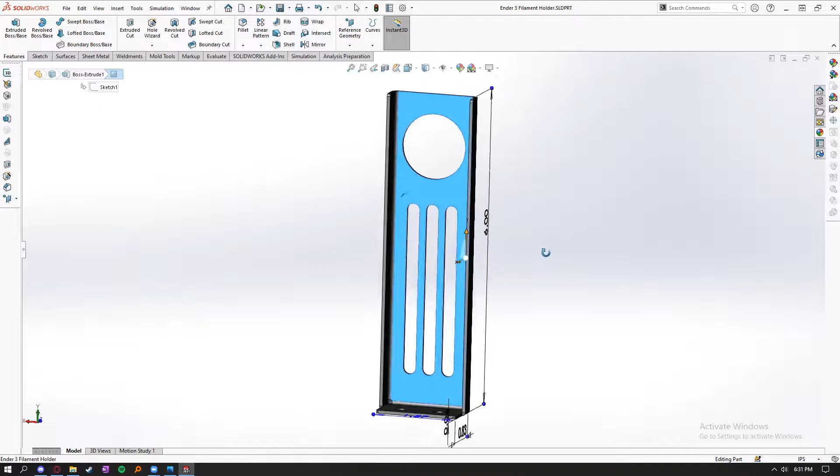Alrighty, so SolidWorks sheet metal tutorial. This is a filament holder for my Ender 3 3D printer. For reference, I took this picture.

Is this showing up okay? Yes. Yeah. Okay,

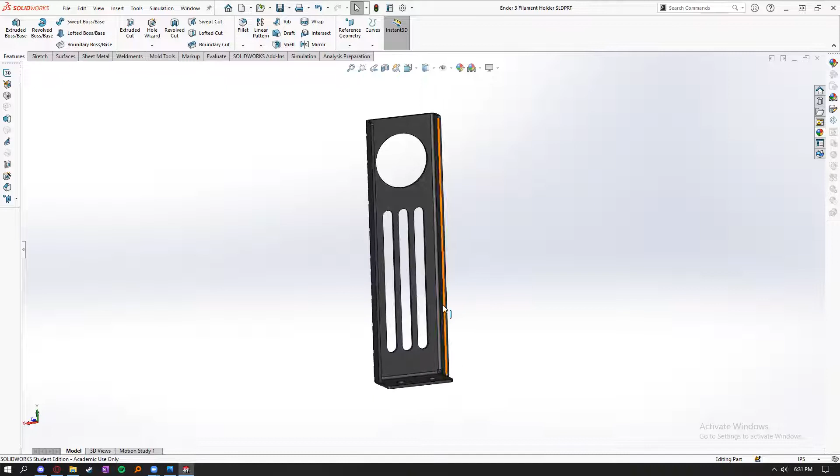so you can see it here. It's just a little bracket that bolts to the top of the printer and basically just holds the roll of filament. And this is the example one I did. That turns out to be pretty much the same, but I took some measurements and yeah, so we'll go through the process of duplicating this. However, the basic fundamentals of sheet metal will be applicable to any part that you make, different bends, different geometries, all that stuff. It'd just be the same process.

So there's many ways of doing sheet metal. My methods have changed over the past 5 years. I used to do it the hard way, and now I have learned an easier way. So we'll go through that in a second. That being said, all ways are valid. I have my own style of doing things. People have different styles you develop over time. SolidWorks is very free in that way, where you're able to customize things to your liking, and then if you produce good parts, it's all good.

However, there are a certain set of standard practices that make editing parts easier, sharing parts easier, and if someone else wants to come look at your CAD, if they want to change something or they want to understand how you modeled it, if you follow some very simple principles, it'll make it a lot easier for yourself and everyone else around you.

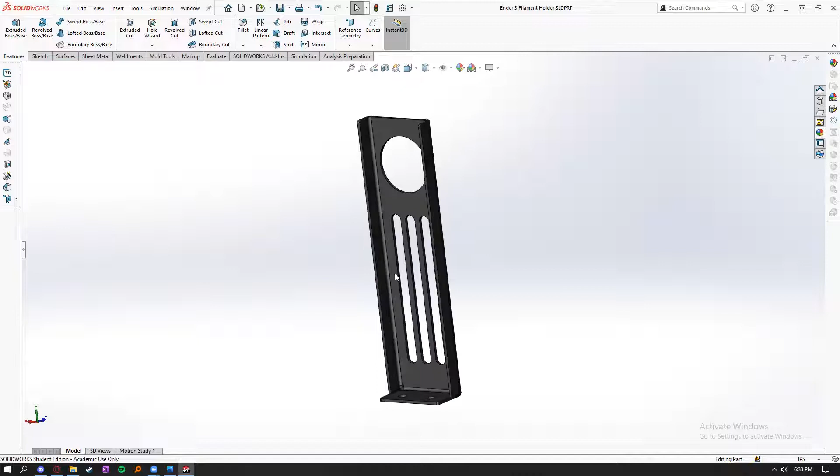So we'll set up a new part. So I just have an imperial part. You can change your units down the bottom right corner here. So we'll do inch pound just because we are friends with the Americans. All right, so I'm going to do a sketch on the right plane. So we're going to right click on the right plane, make a new sketch. And then we're just going to do the basic side profile of our sheet metal part. So this is the new way that I've learned a while ago. So just make a rectangle and then a vertical rectangle.

Oh, we got one more. Hey, Paul. We're just starting out. Feel free to follow along, it's literally just made this sketch so far.

So this is basically going to be the side profile of our main bracket. So doing this method of sheet metal, basically I want to make what is the base plate of the part that everything else is going to be bent off of, or whatever can get the most geometry in one sketch. So in this case, I'm doing the side profile. I'm just going to make the sides equal.

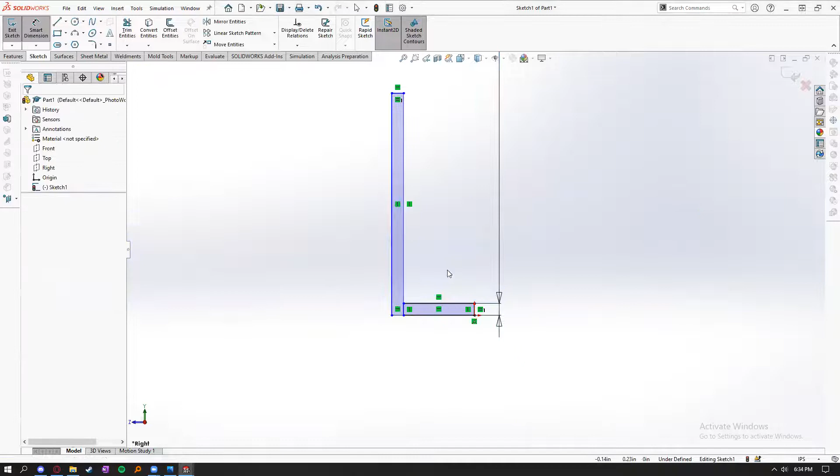I'm going to make that to 16 gauge, which is 0.0598. 0.0598 is 16 gauge sheet metal. I don't memorize all of this stuff, I had to go look it up on Google when I was making this. Because I measured the actual thing and it was like 0.061, and because it was painted, it's a little bit thicker. Closest thing was 16 gauge.

So now both of these are 16 gauge, and I'm just gonna trim up this sketch. I'm gonna go trim to closest, which is my favorite one. You can do power trim and trim away inside, but trim to closest is very consistent. And because I'm very anal about my CAD, I got an extra line here. It's not important. I could leave it. I'm just gonna delete that one, drag it over, connect it.

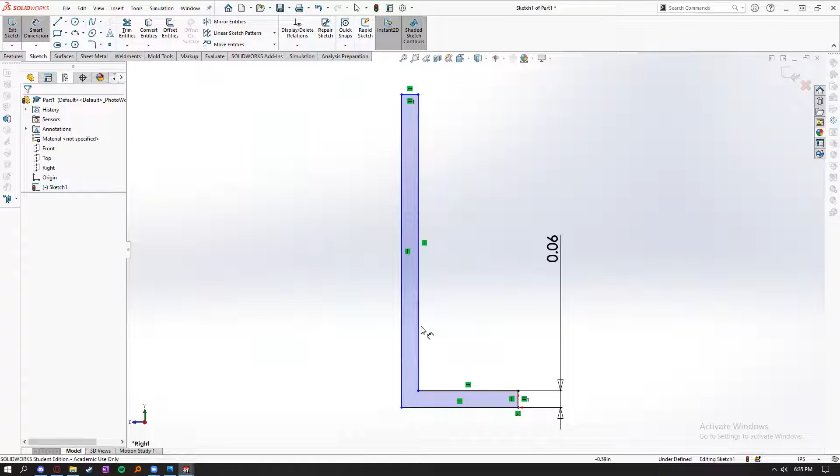So as I'm doing this, you'll notice that all of these lines are slowly going to start turning black. And that means they are fully defined. And a fully defined sketch is a happy sketch. I believe that's 0.8. And I believe that this is 6 inches. All right. That looks about right to me. All right. Everything is fully defined. And I am very bad at explaining sketches properly. So is everyone up to there fine?

How did you do the equal for the thickness, the gauge, for both of them? Yep. So I'm just doing a geometric constraint. So I'm clicking on one line and then holding control, clicking on the other line. And that will bring up this box of different options. It'll also be on the left side, if you don't immediately click there, the box just kind of goes away. Oh, okay. So you got all of these different ones.

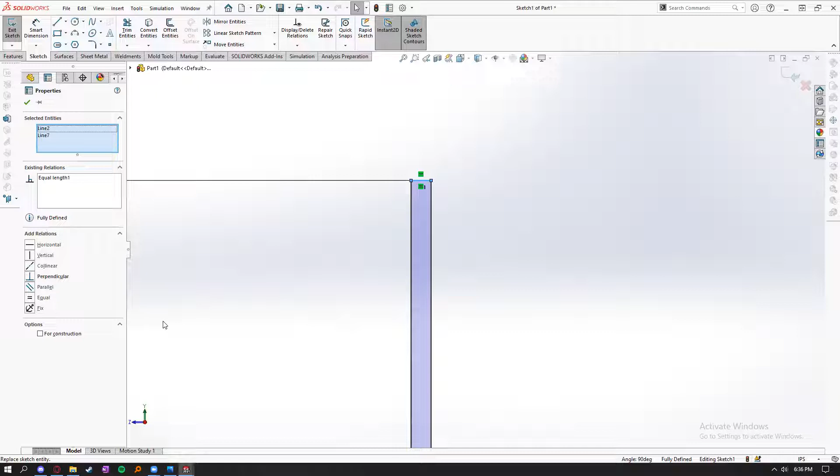I just made them equal. So they're equal length lines. Otherwise, you could just do another 0.0598 on the top here. But if I wanted to change the thickness of this part, then I only have to change one dimension. Okay, perfect. Thank you.

Yeah, so we got a fully defined sketch. Nothing can be changed. So I'm going to extrude that. So going to features, extruded boss/base. And I'm going to make that, how wide is that thing again? Like 1.6. Let me just double check that.

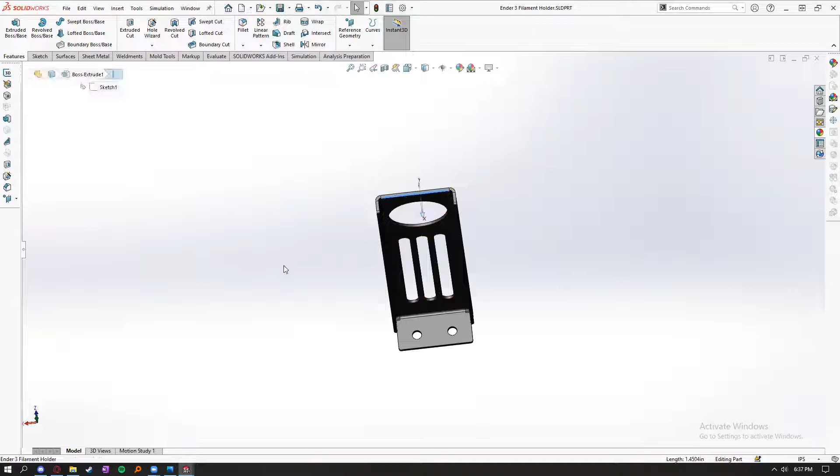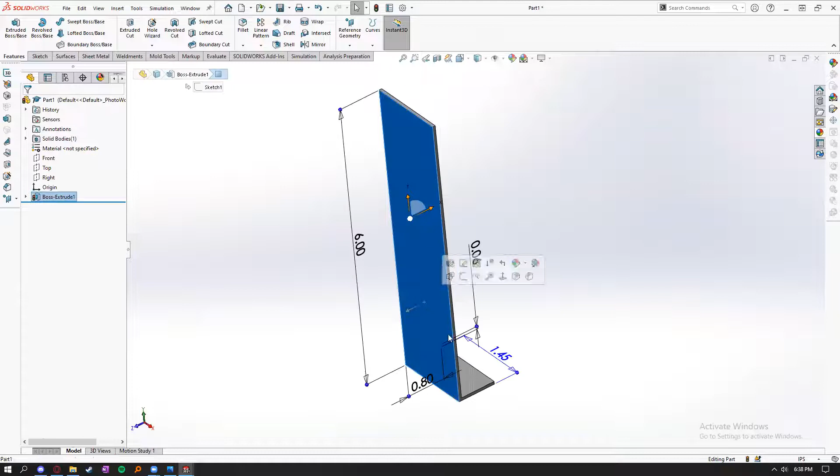Like 1.45 for no reason. So a quick way of editing the thickness is you can just click on the part and you'll see all these dimension lines pop up. I can just click this, double click that. And that changed it, I think. Rebuild? Yeah, there we go. Yeah, rebuild button up here just basically makes sure everything's back to normal. All right, so we have our basic L.

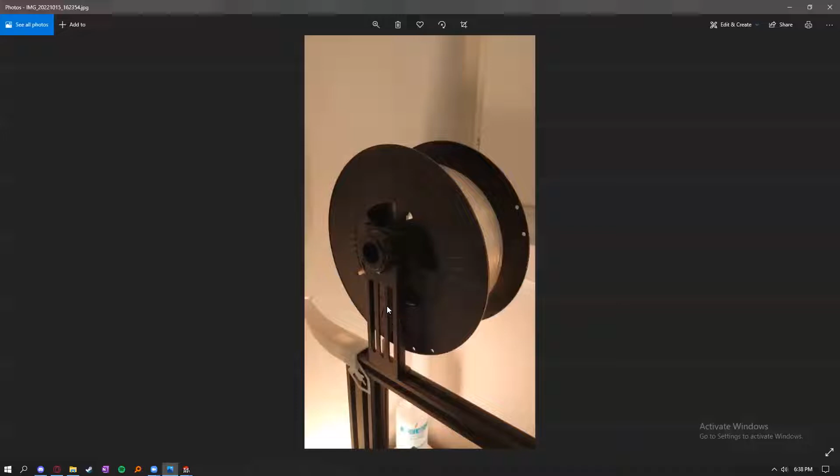We've got our basic L. And what is next is I'm just going to make the holes in the bracket. So something similar to this. So I'm just going to make a sketch on the front of this. Sketch on the front. Just first off, I'm just going to put a center line down the middle. Just for fun.

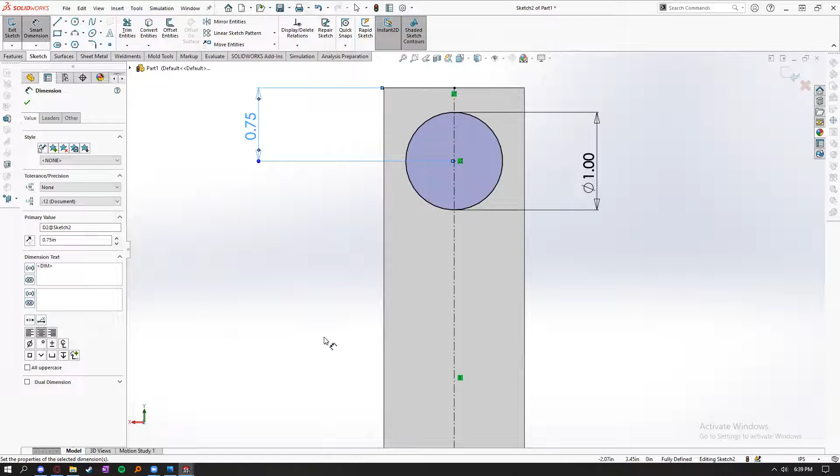And I'm going to put a circle in that center line of a dimension, we'll say 1.25 inches. Is that right? We'll say 1 inch. Not critical at all. So we got a circle that's bound to the center line. I obviously want to make sure that it's fully defined. So I'm going to say that it is 3/4 of an inch from the top, which looks about right. I'm looking over to my left, looking at the actual part.

So we got that one, and I'm going to do the little slot holes. So I'm going to use the slot tool. There's many different slot options. I like to use the center point slot. I'm going to do one again on the center line. You notice it kind of has these lines going out. That's going to be the length of your slot. And you're going to click and then click again. Doesn't really matter how big it is. Let me just double check these sizes. Yeah, 1/4 inch, of course.

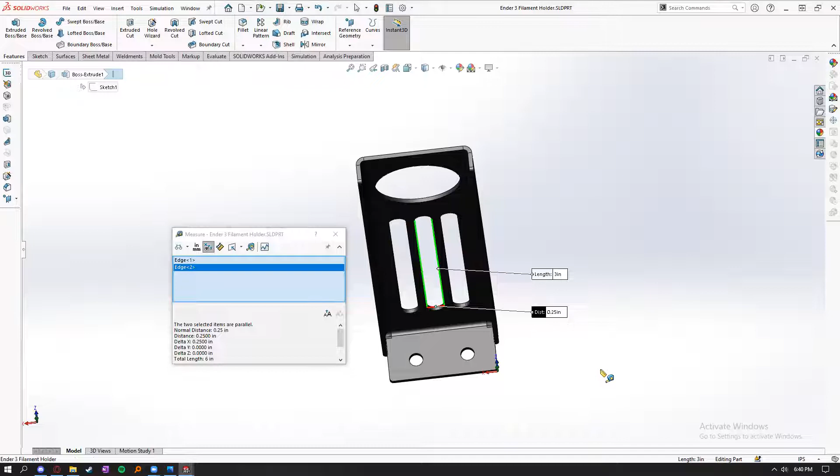So sketch. I'm just going to dimension this real quick to 1/4 inch. And I'm going to dimension the length to be, say 2 point, yeah, we'll say 3 inches. Nice even number. And then, of course, it's still not fully defined. So I will do a dimension from the bottom here.

So a trick for dimensioning from arcs is if you just hover over the arc, you'll see a center line dot pops up. And then if you click on that dot, you can actually dimension from the bottom. Otherwise, it'll make you dimension from the center of the arc. So I'll show you that real quick. If I just click on this arc in the bottom, it'll go from the center, which is fine. But sometimes you want to know how much clearance you have or how much material is actually here. So you can hover and it'll pop up.

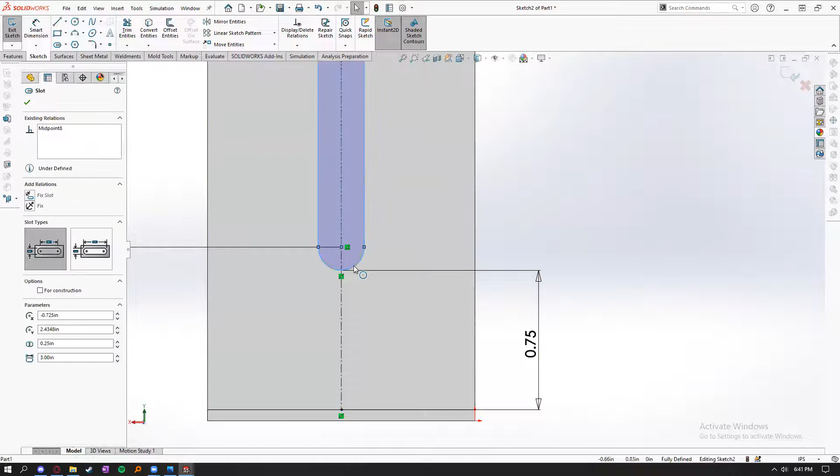And I'll make that, we'll say, 3/4 of an inch. Sure, why not? I think you can also select midpoint. No. Yeah, never mind. You just have to hover. Boop. And you can put a point there if you really want to have it. So I'm gonna make 2 more. Actually, I'll just make a little line first. Midpoint lines make it easier. So I'm gonna do that. I'm gonna make that like 3/4 of an inch again.

And then a quick way to make this into a construction line is if I just right click it, it's this symbol right here, construction geometry. Boom. Construction line. And then I'm just gonna match these up roughly. And then there's a new tool I learned of while making this. If you control click all of the slots, you can do equal slot. It does all the dimensions for you already.

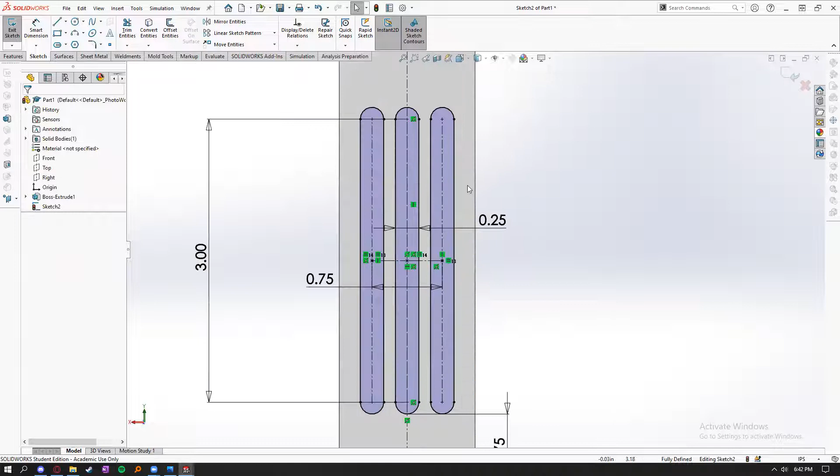All right. So how are we up to there? For those following along. I'm doing good. All right, I hear no protests, so we will continue onward.

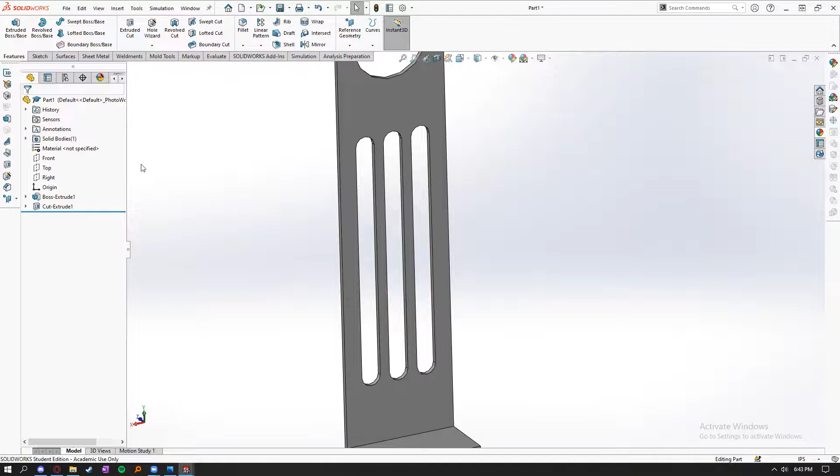So I'm just gonna do an extrude cut through all, up to next, same thing. Just means that if I change the thickness of this, this cut will still go through the entire thing. All right. So we have our base flange. So real quick, I'm just gonna save this. I should have saved it more.

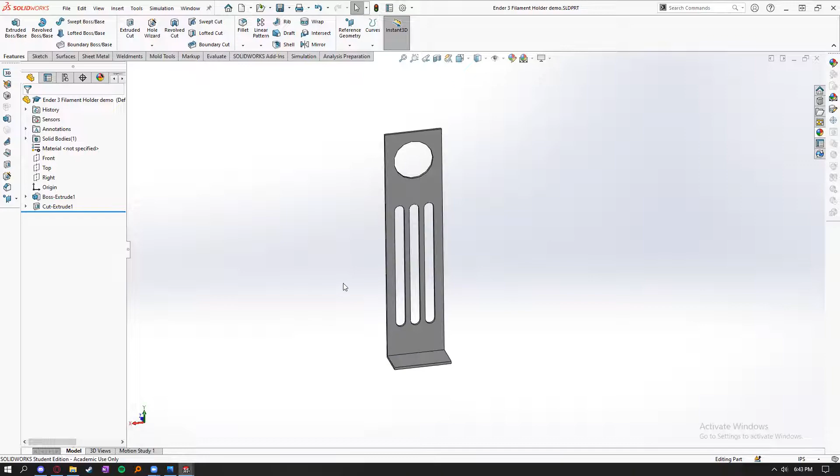So next thing I'm gonna do is we're gonna add our little side flanges. So these bend out, just to give it some more support in this direction, axial with the filament holder. That's a very common thing, just a little bracket, little gusset type thing.

So again, I'm not even gonna touch the sheet metal tab. So I'm actually gonna talk about sheet metal tools, what is available, real quick. So this whole time I could have been working within the sheet metal tab, which I'm not too sure is attached here by default. I think it is. I don't know if I've included it myself, but if it's not, you can just right click, go tabs, and go sheet metal. You can also turn off and on anything you like here.

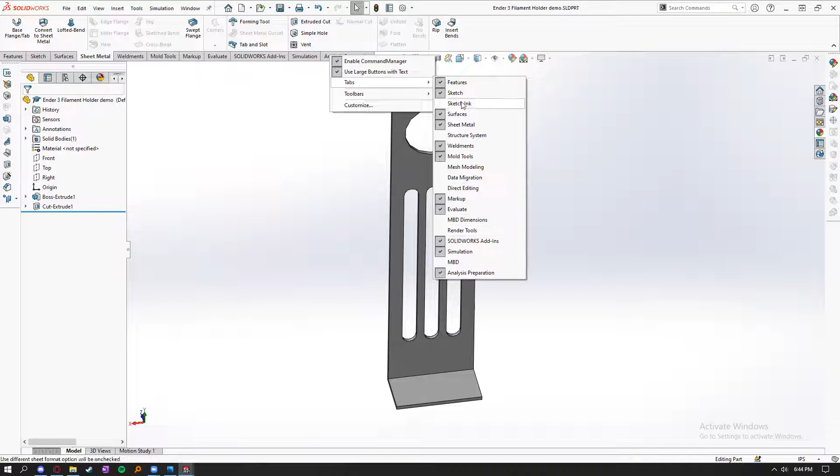So these sheet metal tools are quite good, and that's how I started figuring out sheet metal on my own. Often you will start with a base flange or a tab, kind of like this. So it would just be this face, this sketch, and this would be our base flange tab. And then everything else added onto that would be edge flanges, jogs, sketched bends, all of these additional things, which thankfully SolidWorks does a pretty good job explaining.

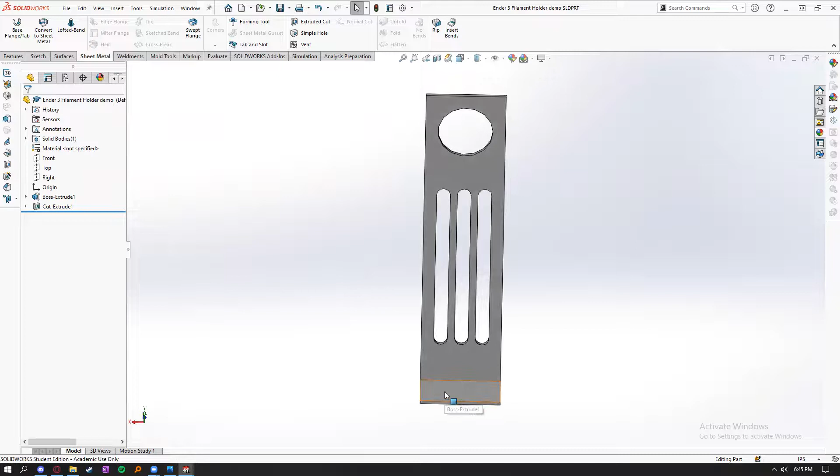And that's totally fine. The only issue with that is it can be difficult to make things accurate. So, for instance, there's gonna be a couple holes down here. If I wanted this distance to be exactly 5.1902, and I had maybe another 2 bends in here, so if this was all wonky, it would be really challenging to make that accurate. And you'll notice if you've done this in the past, if you use these and you wanted to make a whole bunch of very accurate features, that it would be very challenging, and changing stuff is a huge pain.

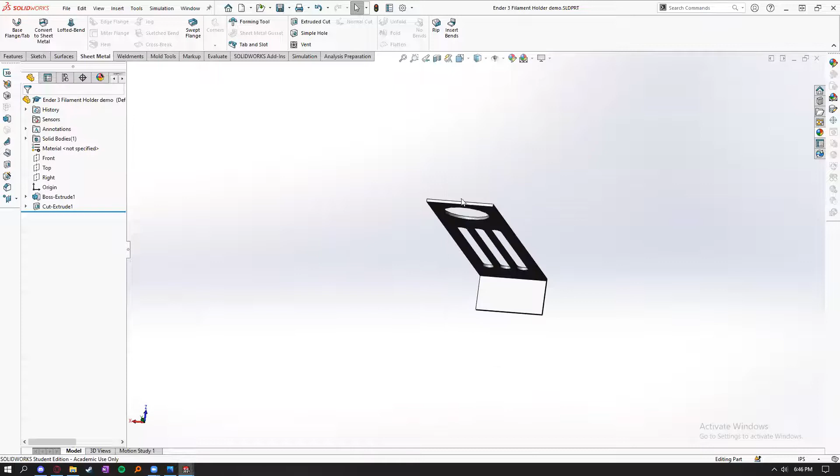So starting with just a straight up normal boss extrude, cut extrude, and then converting it into sheet metal is a lot easier than doing all of this stuff if you want stuff to be accurate. If it doesn't need to be accurate, you can totally do this. Totally fine. And I could do this for here, but I just do it for everything because it's just easier, to be honest.

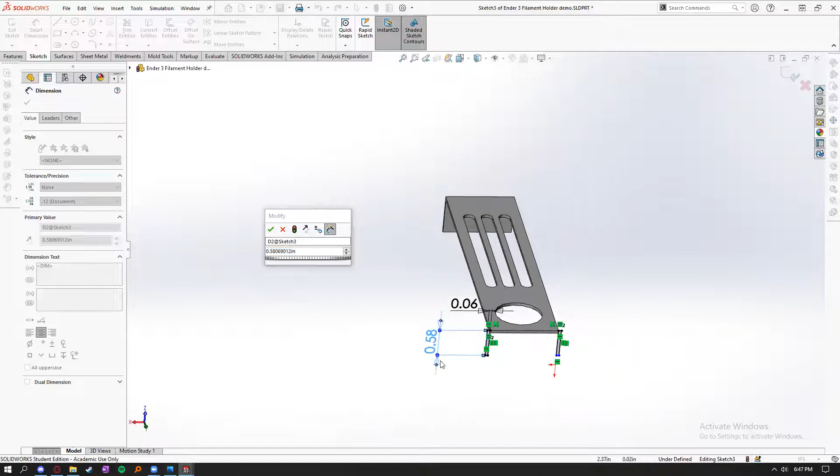So I'm gonna do the side flanges here, which is gonna be a little bit weird, but I'm just gonna start a sketch on the top. Gonna make some rectangles, and as before, I'm gonna control click these lines and make them equal. Gonna dimension that to be 0.0598, 16 gauge. And I'm gonna set these to be, we'll say, 0.58 of an inch. And I'm gonna set these lines to be the same length as well. All right, so everything's defined.

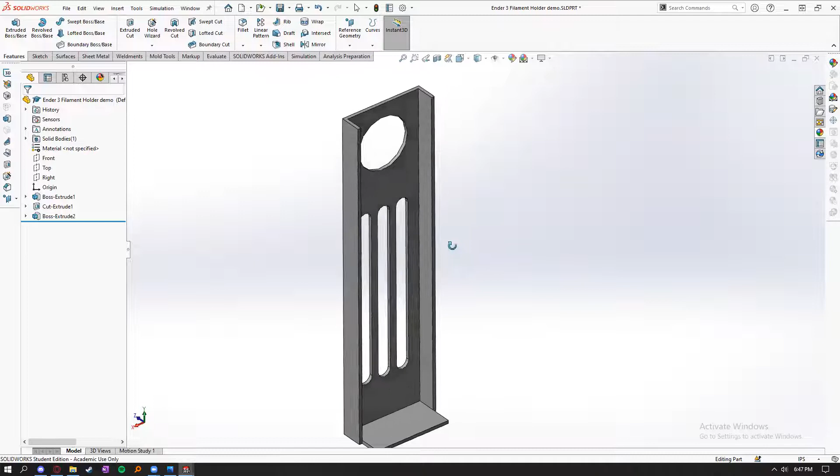And then we are going to quickly extrude down to the bottom surface. So in the directions here, instead of going blind, I'm gonna go up to surface. And I'm gonna select the bottom surface here, then extrude all the way up to there. All right, so we've got what kind of looks like the bracket already. It is pretty much already there, but it's not sheet metal. So now is the step to turn it into sheet metal. So I've got all of our bends, got all of our pieces all ready to go.

So I'm going to go to the sheet metal tab. I'm going to go to insert bends. And so in this side box.

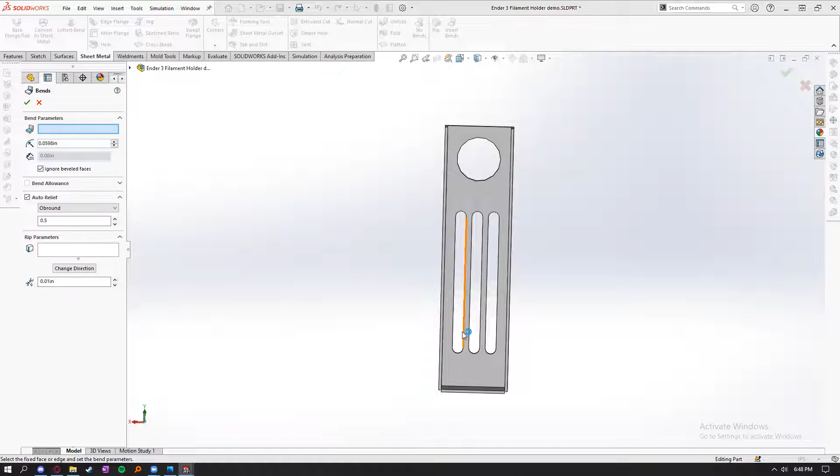So these bend parameters, you're basically selecting what face you want the part to be bent off of. And so for this, I think the main face is this guy, because basically this is gonna stay flat, this is gonna be bent up, this is gonna be bent up, and this is gonna be bent up. And basically everything is bent off of this main face. So I'm gonna click on this face.

So we're gonna go down here. This is the bend radius. Good rule of thumb, bend radius is usually the same as the material thickness. So 0.0598 or 60 thou, basically the same thing.

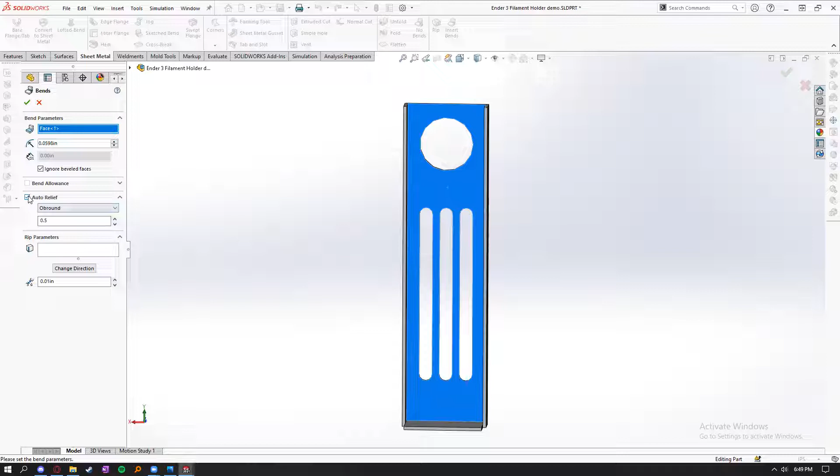So we've got auto relief. I've checked that off. So basically in sheet metal, there's certain geometry that can't be bent, because right now as it is, this can't be bent. These corners are not possible. And you'll see what will happen if we have, you can select any of these. I have obround, no particular reason. So we'll try and do this and we'll see what happens.

No bends found. Weird. But I know exactly why that happened. That was actually planned, by the way.

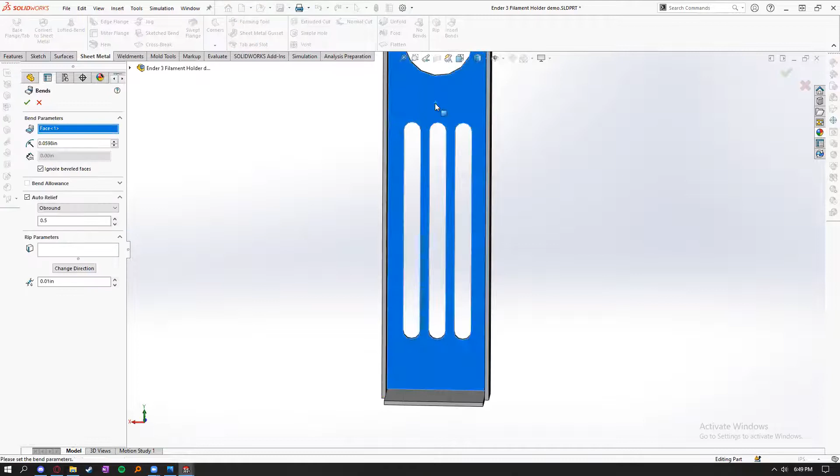We need to rip these corners, because right now it thinks that this is all of the same thing. This is all one face, and it's like, there's no bends here. What are you talking about? What are you on about? So I'm going to select this line and that line. And auto relief cuts are made for one or more bends, and you can see those appearing down here.

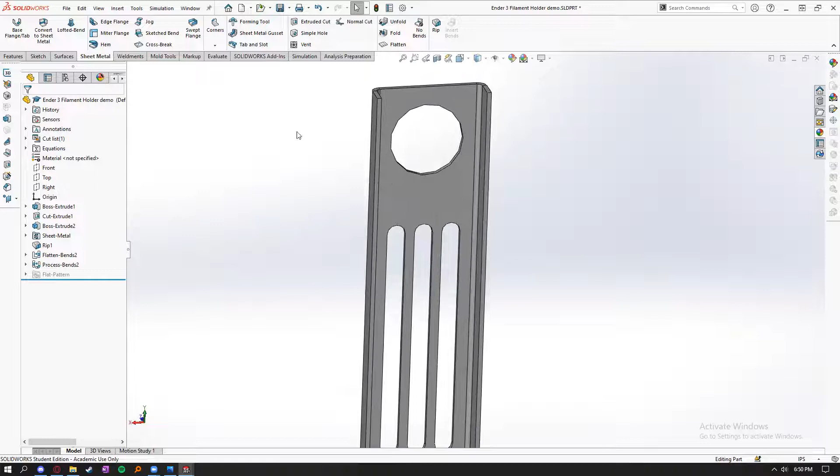And just like that, it's sheet metal. This is pretty much done. It is done. The rest of the stuff here is just fancying stuff up, trimming corners, and I'll show you that in a second. But you'll see that this is a sheet metal part. All the bends are there. It's got the bend radius, and I didn't have to do any of this miter, flange, jog, all this other stuff, which tends to be rather annoying.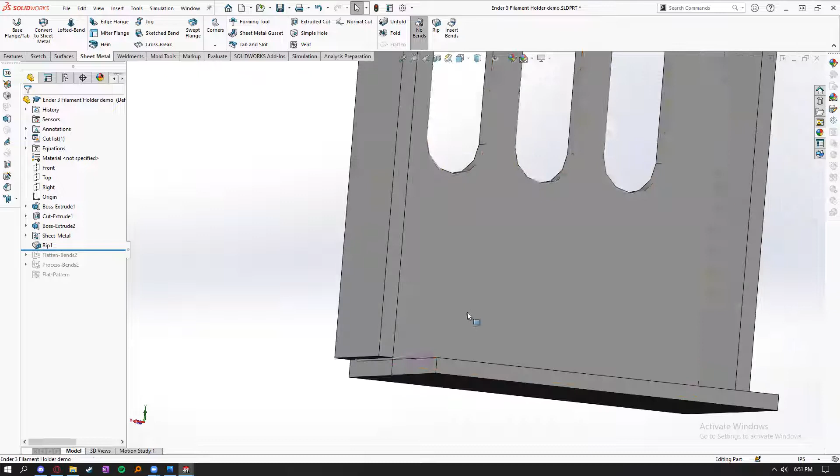So I'll show you what appeared here, because we were right here, and we got all this extra stuff just popped up. So get the sheet metal. Just turn this into a sheet metal part. It ripped these corners down here. So I probably could have set this to be the same height as this, probably lead to the same thing, but there's a little tiny extra relief here, which probably would not even show up in manufacturing, maybe. But it just adds some extra bend relief.

It made the flat pattern, and then it sort of flattened the bends and it processed the bends. It's kind of strange that it did that reverse, but I don't question the computer. So you got everything here, and this is the flat pattern, which can't be used to add stuff on, but it actually is for making drawings.

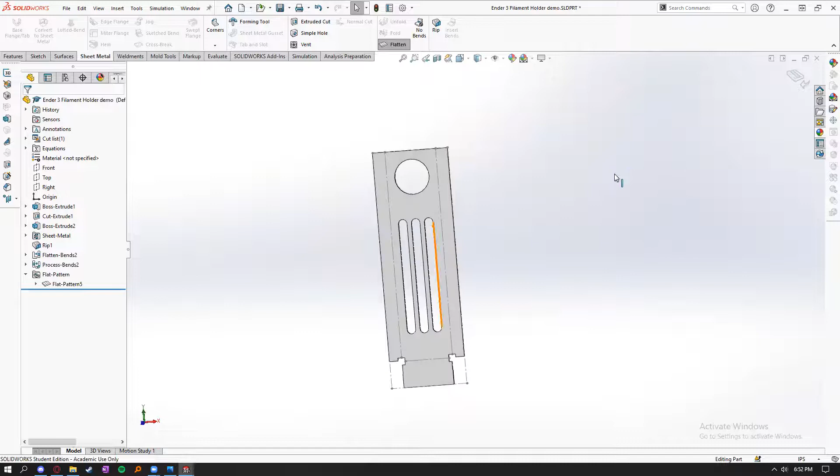So if I unsuppress the flat pattern, you notice that this is what the pattern would look like if this was plasma cut, water jet, or laser cut out of any material. So this is the face that you would basically turn into an SVG or whatever, to be water jet. So we can suppress and unsuppress that to get back to our sheet metal part.

So the only other things I'm going to add on to this is I'm going to round these corners off because they are sharp, and sheet metal is very sharp. So sheet metal does have a corners tool. It's got corner relief, break corner, corner trim, but if I do that on this one, it's going to trim this bottom corner as well, and I want to save that one. So I'm just going to go back to regular old fillet.

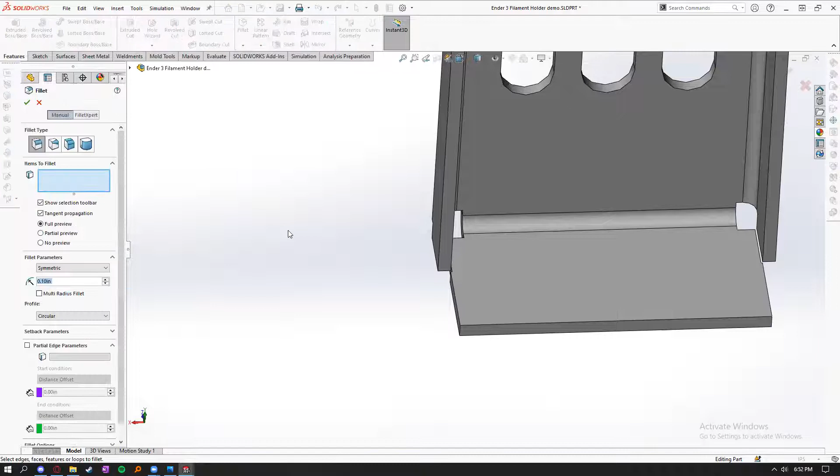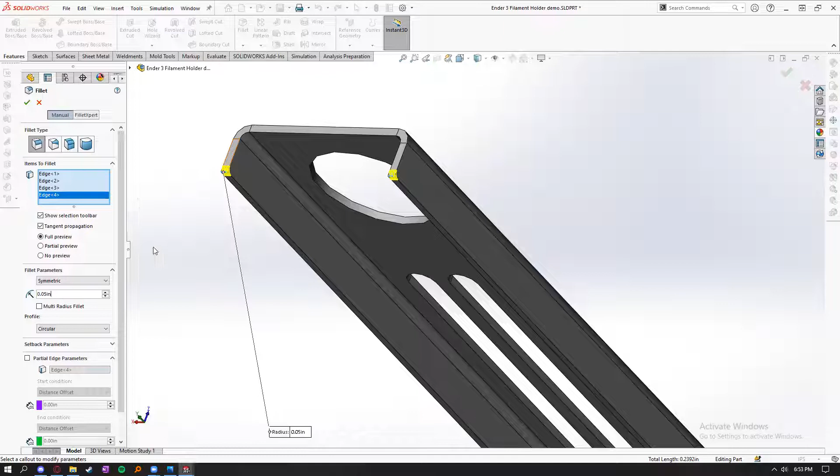I'm going to change that to 50 thou. 50 thou is usually the minimum size for a fillet where sharp corners don't become sharp anymore, usually a good number. It's basically as small as you want to go for any sort of fillet. Any smaller, it's not really going to make a difference. So doing 50 thou on 1, 2, 3, 4.

And a good rule of thumb is to try and do your fillets last in any geometry. So have them at the bottom of your feature tree. It just makes editing things and changing parts easier. If you have them intermittently, you notice that when you try and edit stuff or add on new features, SolidWorks can get annoyed for large components.

And I'm gonna do an extra thing here, which is on the actual part. You can't really see, but this bottom is welded here. This is how they actually add in that extra structure. So for fun, even though this is totally unnecessary, I'm gonna do a corner weld. I'm just gonna click in there. Easy.

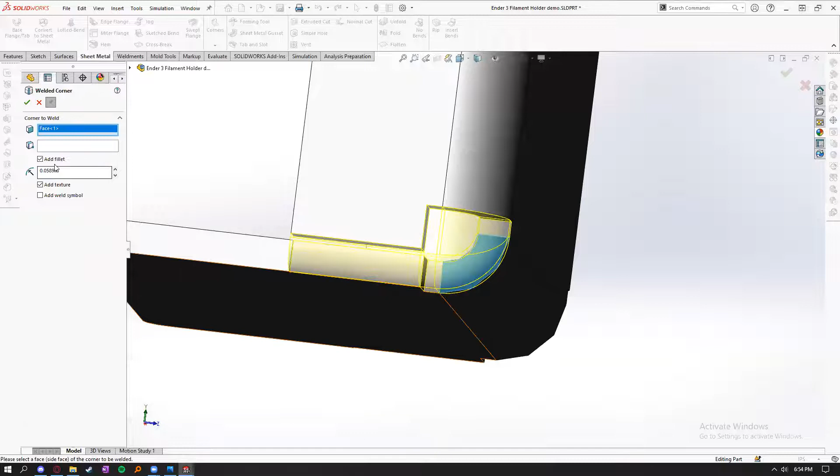Boom. I'm gonna do the other side. I don't think you can do both at the same time, so do one face at a time. Yeah, the weld symbol. Look at that. It already adds it in there for us.

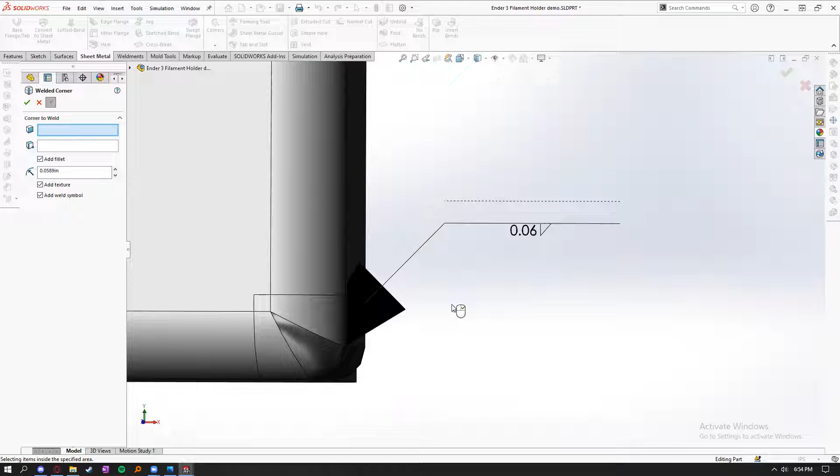So weld symbols are a rabbit hole of drawings that you can get into, and probably late in your professional career, if you're working for a big company or something like that, you will need to know them. I mean, pretty straightforward. Just Google it. I've had to Google it a few times for making drawings for some of my co-ops.

This symbol basically just means a fillet weld. Fillet weld on the outside, fillet weld on the inside. This is the radius of the fillet, or the radius of the weld. And if there's a number on this side, then it would be the length of the weld, so basically how long the weld is. That's the basics. I actually don't know what this dotted line is. I actually do not know, but Google would probably tell me.

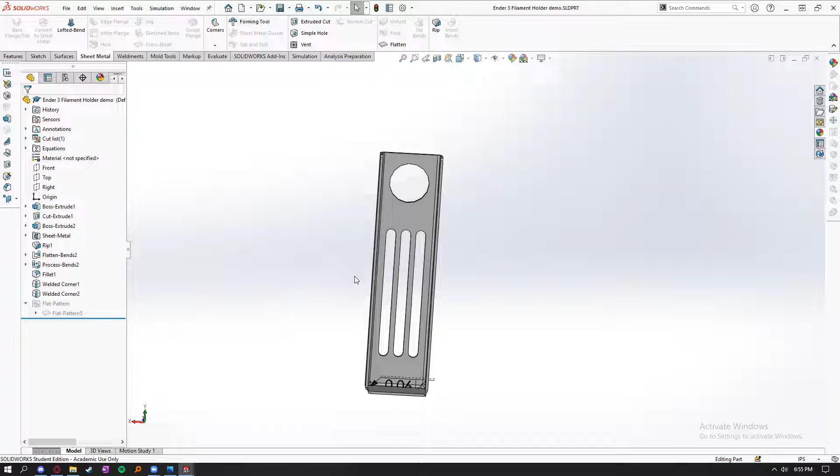All right. So yeah, that's done. I forgot to check in. How are we doing up to there? I was wondering, how do you do the 3 symmetrical slots? Yeah, for sure. So we'll jump back.

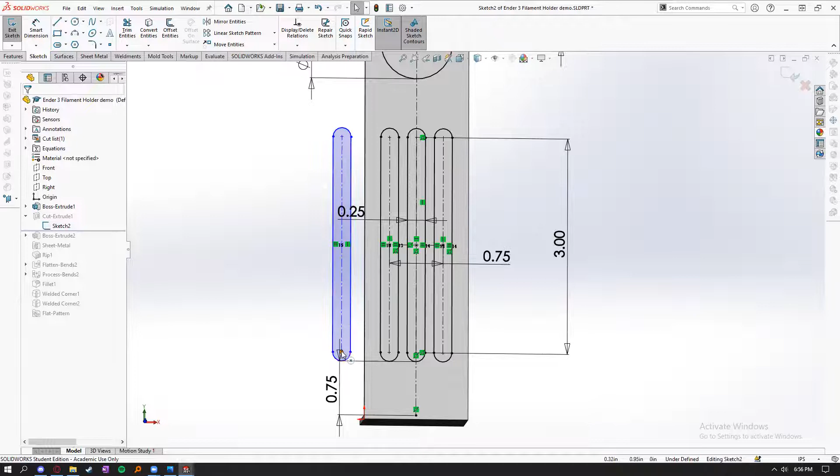So in this sketch, basically, I just did a midpoint line from the middle of here to 3/4 of an inch, and then I made 2 more random slots on the outside of any length, and then you can control click just like you would for any geometry, and it is equal slots, and that is equal length and equal width for the slot. Okay, thanks. Awesome.

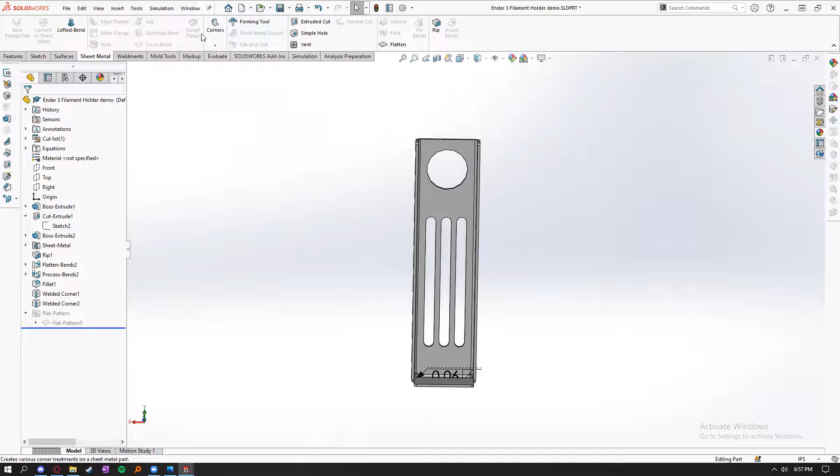Okay. Yeah, so those are the very basic steps for making any sheet metal part. You can follow the same steps to make pretty much anything. You may need to delve into all of these extra edge flanges and stuff if need be, but it's pretty self-explanatory for the most part. It would take some messing around. You'll see there's lots of extra tools and lots of extra features that SolidWorks has. They're still adding to it, so it's always good.

Yeah, so we got our finished part. I'm gonna make it black just for fun, powder coat black. So general SolidWorks wisdom is when you're modeling a part, if you're reverse engineering a part, I like to model it as it was made and as it will be finished. So everything here is exactly... oh, I totally forgot. I gotta put holes on here. Can't even mount it. That's fine.

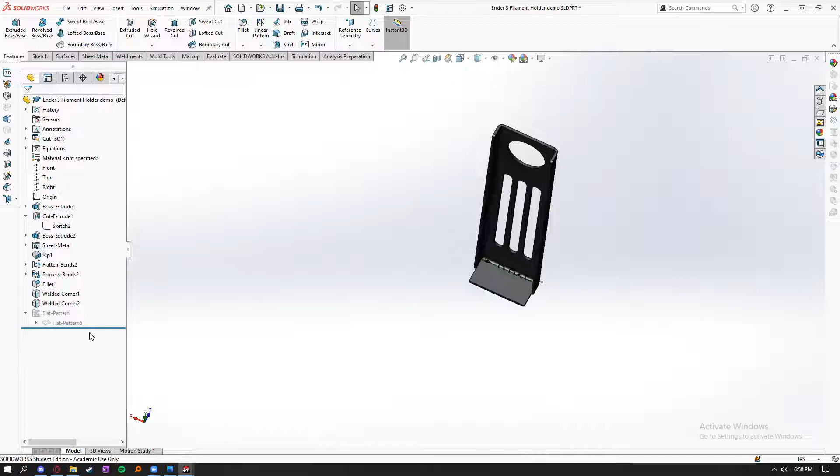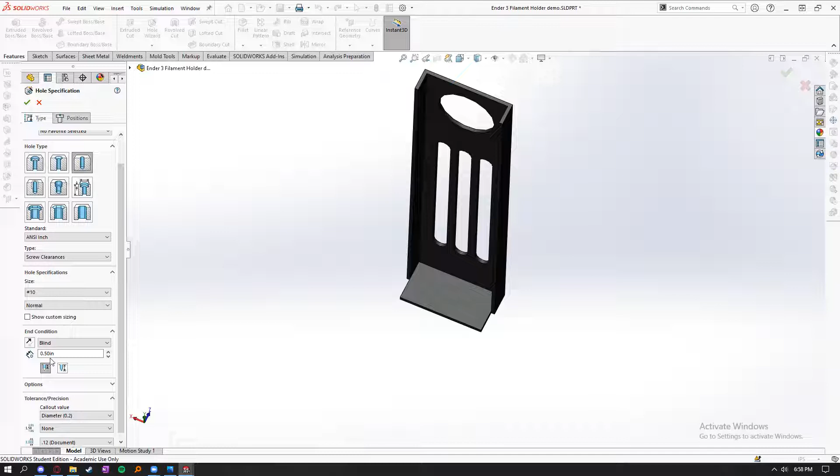So I'm gonna go back to here. Using this little bottom thing is nice for rolling your parts back. So I'm just gonna do Hole Wizard real quick. I feel like I'm forgetting a step. So I'm just gonna make a clearance hole. Using Hole Wizard: clearance hole, screw clearances, ANSI inch. Do #10 or like a 10-32, just normal size. We'll go through all. And then positions. Some people like to do the sketches outside of the Hole Wizard. I like to do it inside, just so that the feature tree is cleaner.

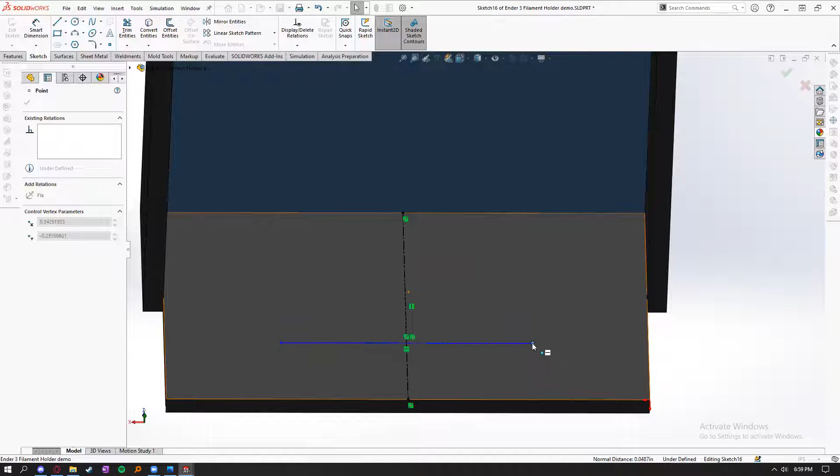So I'm just gonna make a center line here, and then another line just randomly. And then same as before, I'm gonna wait for it. For this one you can actually go select midpoint, but if you wait, it'll pop up. Control click, make those coincident. So now we get a midpoint line. I'm not too sure why Hole Wizard doesn't allow you to make midpoint lines, because it's just not there. It's just strange.

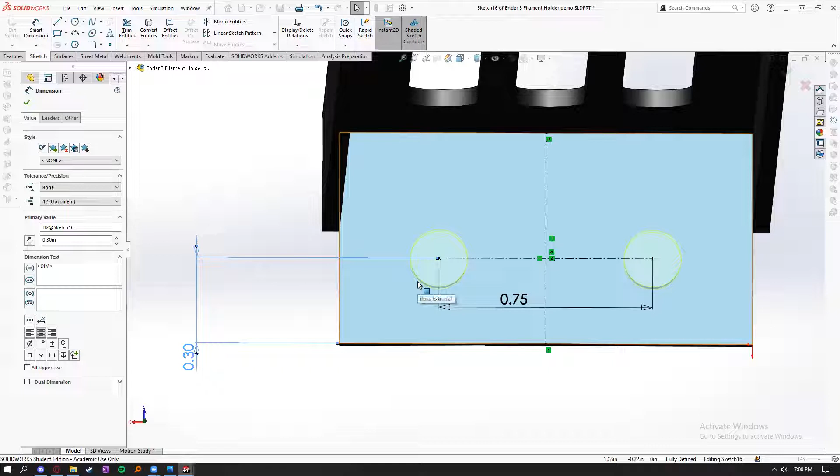And so the way you make holes in Hole Wizard is you need to add points. So point here and point there. Set that to be classic 3/4 of an inch. And we'll say 0.3. A good rule of thumb for distance of holes away from edges is, I think, a diameter and a half is extra safe. How big are these holes? 0.2. Yeah, so 0.3 I actually just guessed. That's a good guess. So 0.2 is the diameter, so diameter and a half, 0.3.

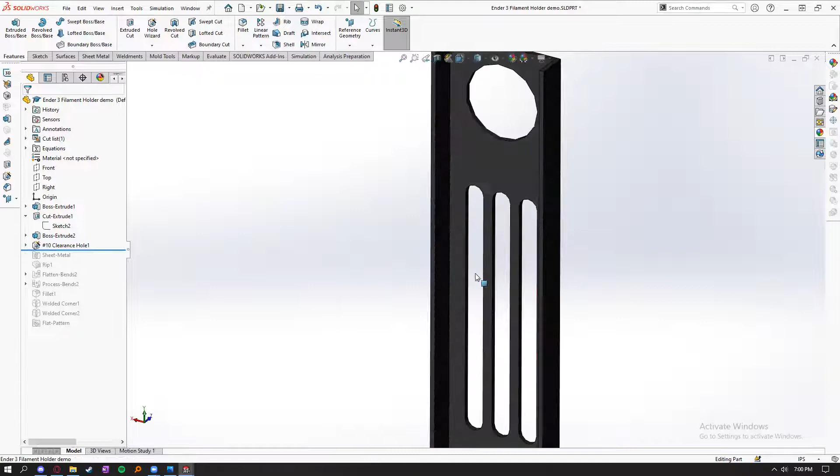All right, so we got our clearance holes there. Roll that back. All right, now we're actually done. Okay. So yeah, it is tempting to just put the clearance holes right at the bottom here, but make sure that they're in the base part. Then you are certain that those holes are going to be exactly in the same relationship position-wise to this hole, and all of these features are going to be the exact same. Nothing's going to change. Okay.

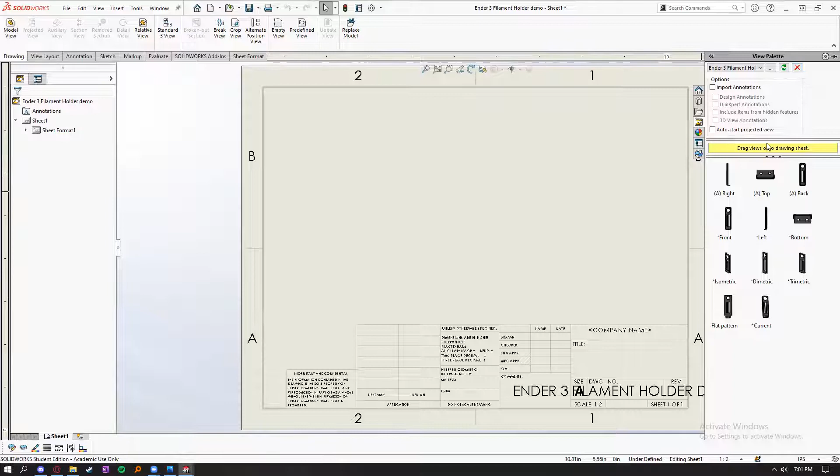So I'll go real quick over making sheet metal drawings. Sheet metal drawings are a tough thing because every shop, every machinist, every fabricator likes different formats. Oh, I don't have the standard format uploaded, but not a big deal. But there are some fundamentals that if you include, you'll generally make people happy. Did I copy that? So I'm just gonna add in the sheet format because the basic one is gross. While this is loading, does anyone have any questions?

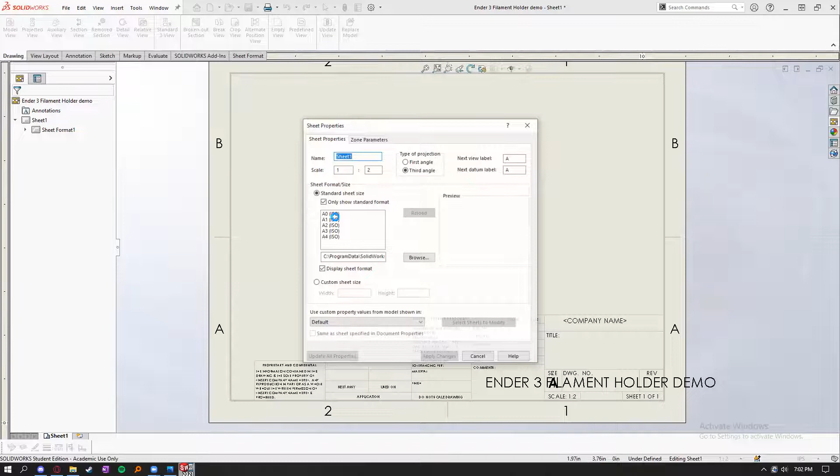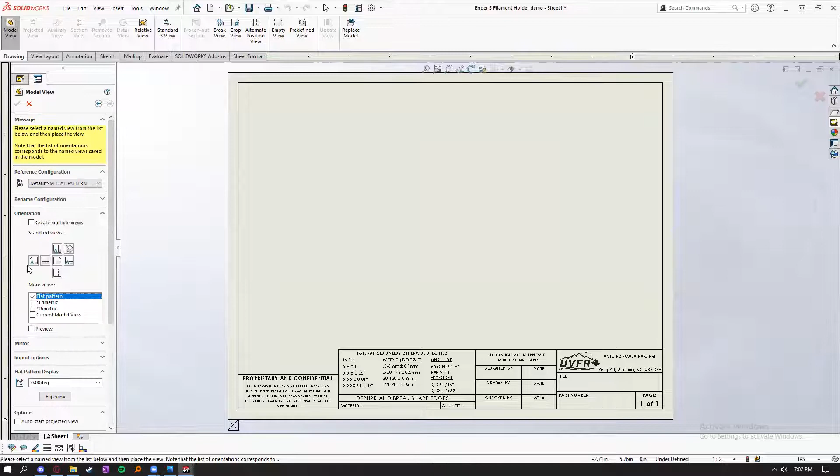Okay. Alrighty, so I'm gonna add in a model view. And I got my filament holder demo. Go next. And then I'm gonna select the flat pattern. And then as we hover over here, click, there it is. And I'm just gonna rotate this 90 degrees. Please. Never mind. Oh, there it goes. Just so it's more evenly spaced on the page.

And I'm just gonna change the scale to be like 2:3. A little bit bigger. Do I want it this way? Which way makes sense? This is the finicky part. Let me just check. Which way did I have it before? Yeah, I had it this way.

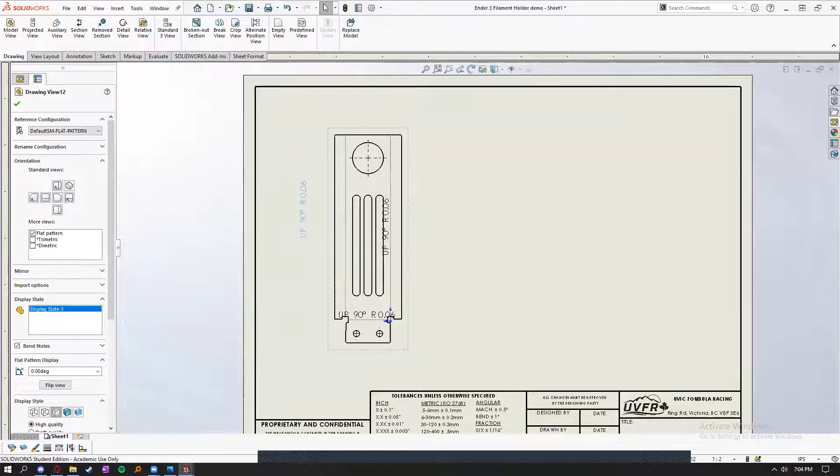All right, so now that we've selected a flat pattern, you notice a lot of stuff is automatically generated. So it has bend lines, it has the bend radius, and the bend degrees already included on the part. They're not in the best positions, but this is totally a personal preference thing, like these drawings. But one thing you do need to have is these are the bend lines.

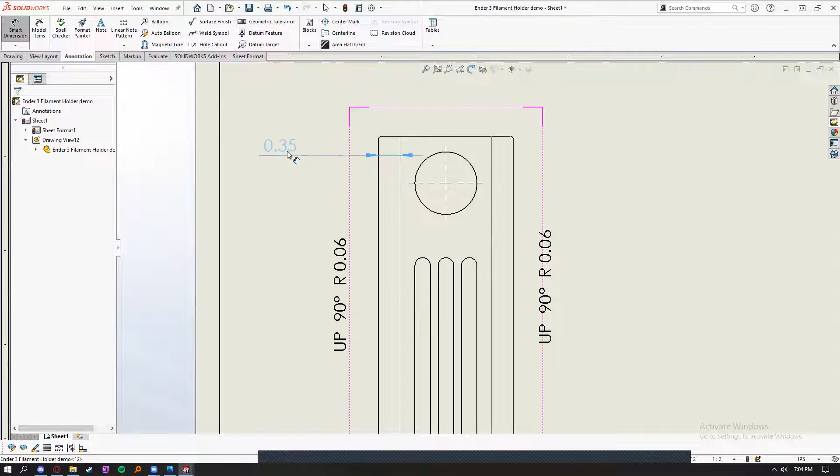You do need to have dimensions from the bend lines to a feature that is measurable or important. So if you had like a center line that was easily measurable from, if you had a very critical dimension, this is where you would put it from. So these are pretty easily measurable. If you measure like, okay, 0.35 from the edge, that's where your bend line's going to be.

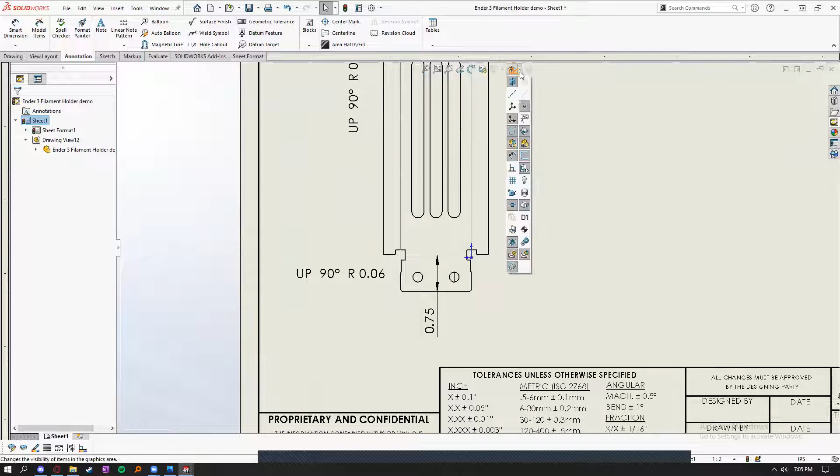And do the bottom as well. So you've got our 3 bend lines. You could just say typ here, but not super critical. Let me think. If you ever have these blue coordinate system things, the way to turn them off is here. So that's in here, this guy.

Okay, and I'm not on my drawing standard. So I made a drafting standard. There it is. That's located in the templates. It's basically just a bunch of preferences that I like, and I'll have to remake these. Over the years, just stuff that I like. Not that.

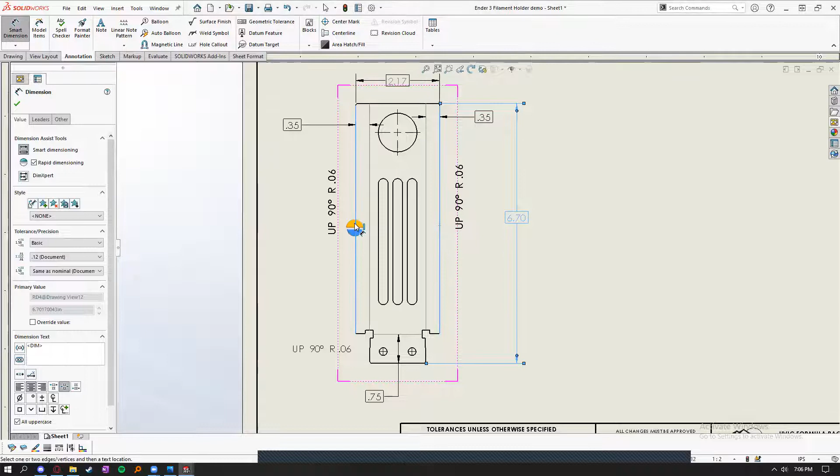So some more stuff that you need in every... actually I don't say that because we've gotten yelled at before, but I always include overall dimensions. So this is basically how big the piece of metal needs to be for it to get water jet or plasma cut. So these are the overall dimensions.

For some reason, I think it was GA didn't want that, which is confusing to me, but yeah, it basically comes down to, at the end of the day, talk with the machinist or shop that it's going to be made at, because they will all want different things. For some people, this at Northwest Fab was good enough. This was good enough for a sheet metal drawing.

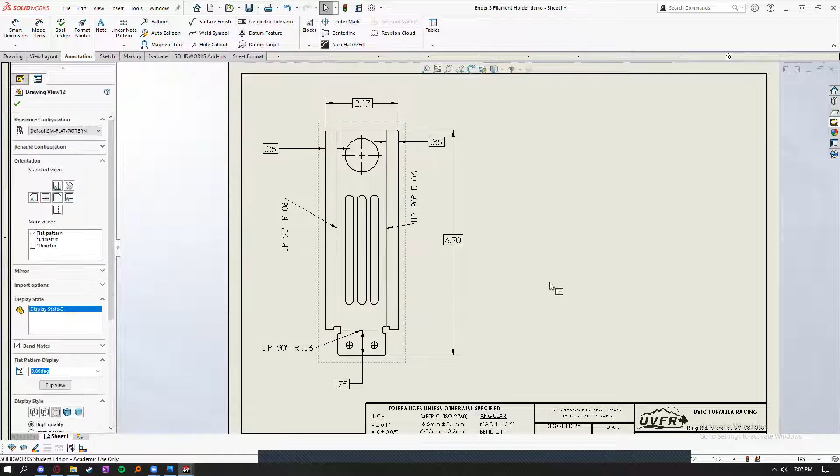Oh, so I'm going to put some letters on here because it might get confusing. Letters are always good. Although these are not in my drawing standard format. Meh. Yeah. So you got the bend lines, dimension bend lines. You've got the radius, the angle, which direction.

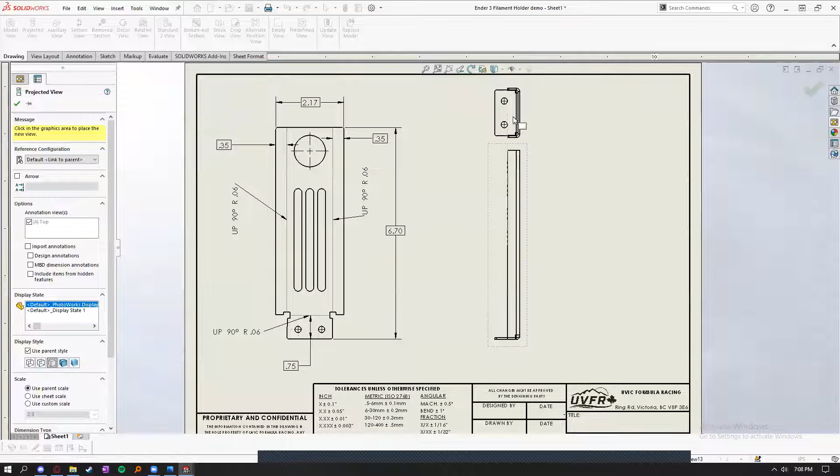But one thing I also always like to include is I'm going to add a new model view. And it will just do like the side. Yeah, we'll do a side. And then we'll make that a little bit bigger. I will do a projected view. I will always add in basically what the finalized part looks like, and also an isometric view.

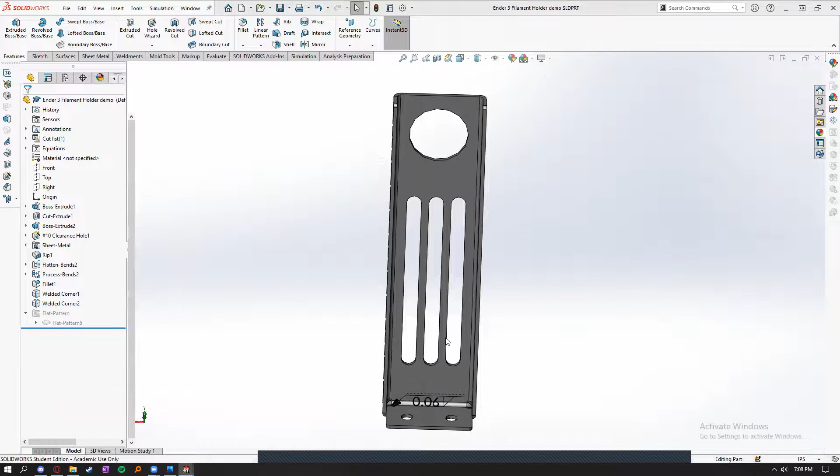Oh, it looks very dark. It doesn't show up super nicely, so I'm just gonna change this to be a little less dark. Be like gray. So the reason I put this as a shaded part is this shows that it is gray. It has been painted. Do I have it like that? Yeah.

So another one I will say, if the part is being post-processed at all, so heat treated, painted, powder coated, I will always put a note that says powder coat black in the top left corner somewhere on the drawing. That just shows it is being post-processed. And I usually will make this a little bit smaller. Doesn't need to be very big. Put that in the top right corner.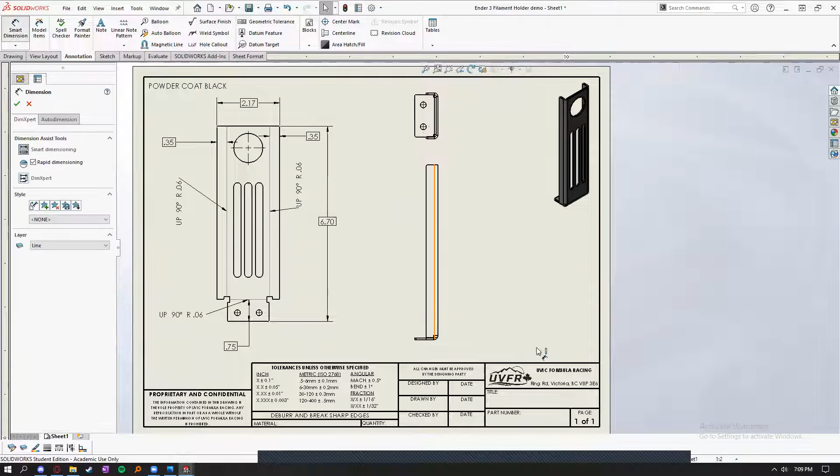Okay, so we've got our ones here. So I will add in bend angles. Ezra was right and said that most fabricators will bend off what is called the complementary bend angle. And if it's some wonky number, like some crazy 32.5 degree angle, I will add in both sides. Basically, anytime you can avoid a machinist or a fabricator doing math, they will thank you, because otherwise they will yell at you. Ask me how I know.

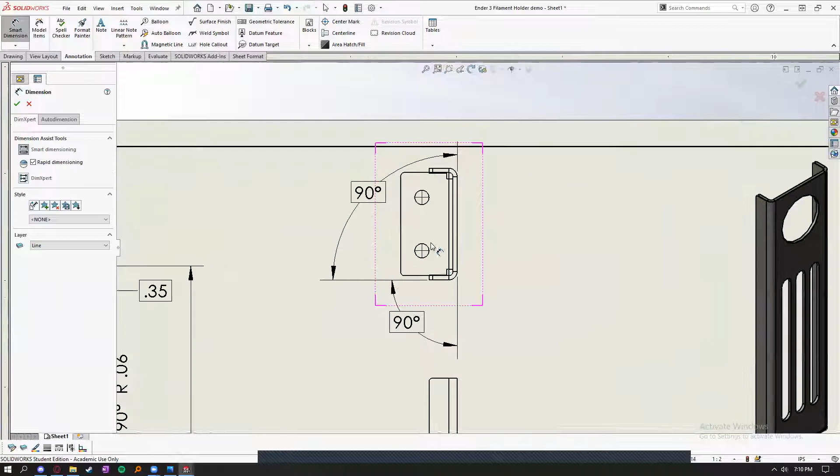So I will do the same thing. So it's pretty self-explanatory that these are the same angle. As you can see, it's also labeled there. This is redundant, but different people like to work off different things. There we go. Not super nice. So this is actually where one trick I like to do is, this isn't very useful how big this is. So I'm just gonna do a break view.

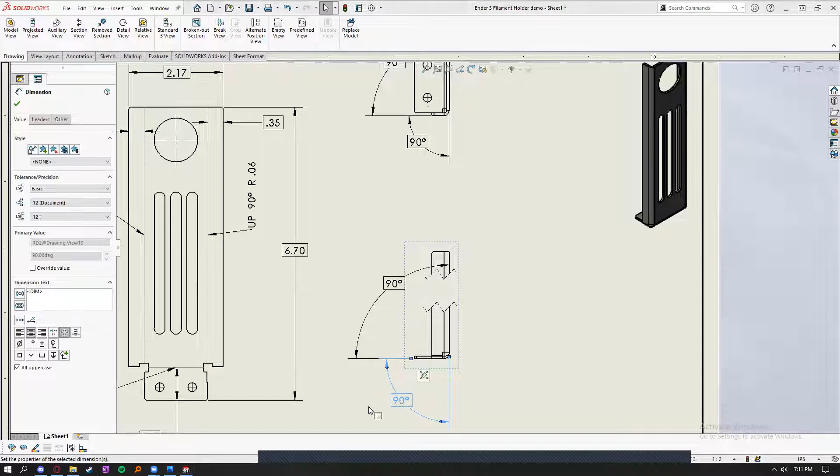Yeah. Utilize those at your discretion. Just save space on the drawing. And this is small? No, that's the right size. I can even make this a little bit bigger. Even make that 1 to 1. See, the break line saved some space. Oops. And able to make this a little bit bigger.

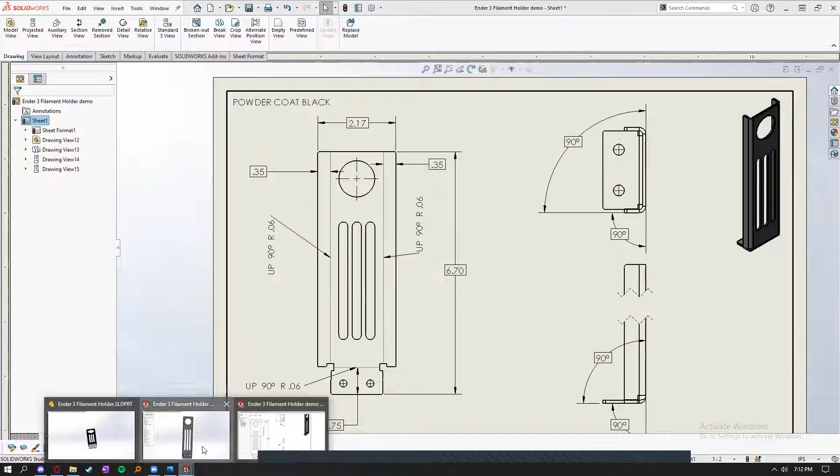Okay, so we have our actual angle and our complementary angle. And we have our overall dimensions. So one thing for the cost report that we do specifically for FSAE is we do have to do water jet length. So I think one way to do that is in the flat pattern. If I make a sketch and convert entities, is it

Ezra, can you tell me if it is the outline or if it's the length of all of these features? If you remember at all either. If he's still here.

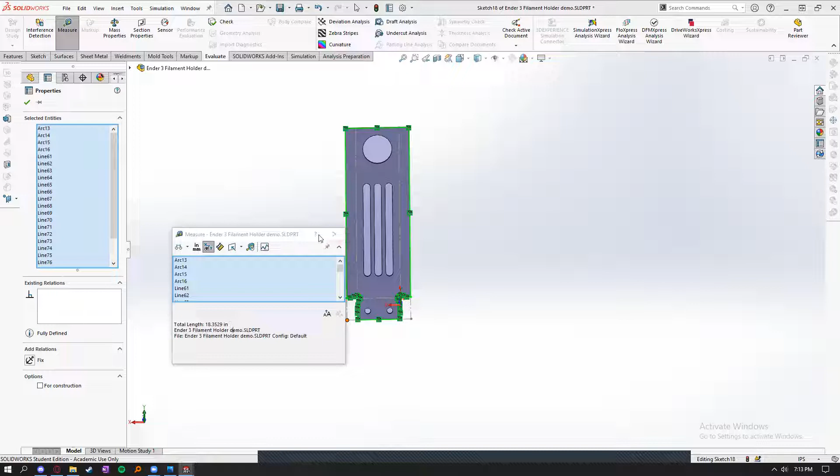Anyways, so I just made a sketch on this flat pattern. You select all, and I have a hotkey for the measure feature, which is Evaluate, Measure. The total line length is here. And so we will add in water jet length 18.3. So I think for the cost report, I would have to convert these inner ones as well, which is kind of unfortunate because you can't really select these nicely.

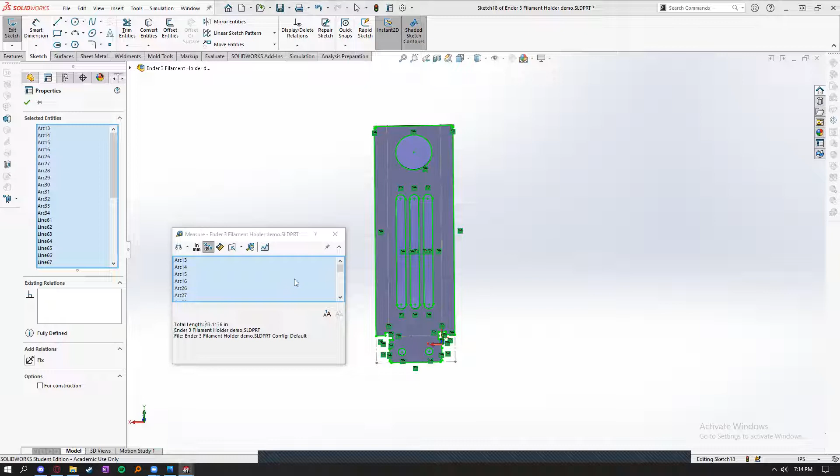One thing I will mention, this is a hot tip. Measure 43.1. So you'll see in some of the drawings, water jet length. That was also one of the ones we added in and sent to GA, and they're like, why is this in here? It's not for you, it's for us. So I added this in a note, total water jet length 43.1 inches. I'm just gonna delete that sketch too.

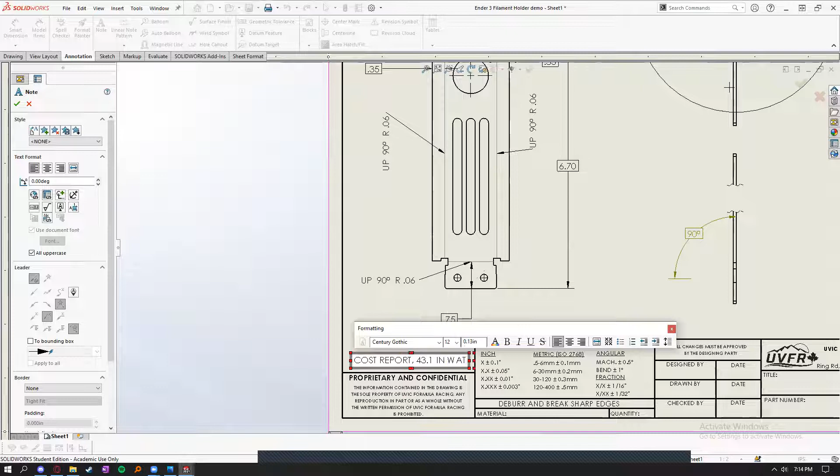So for the cost report, 43.1 water jet. Make that a little bit smaller. Oh no. Oh, I forgot to. So if this happens, this is just because the part is in flat pattern mode. There we go.

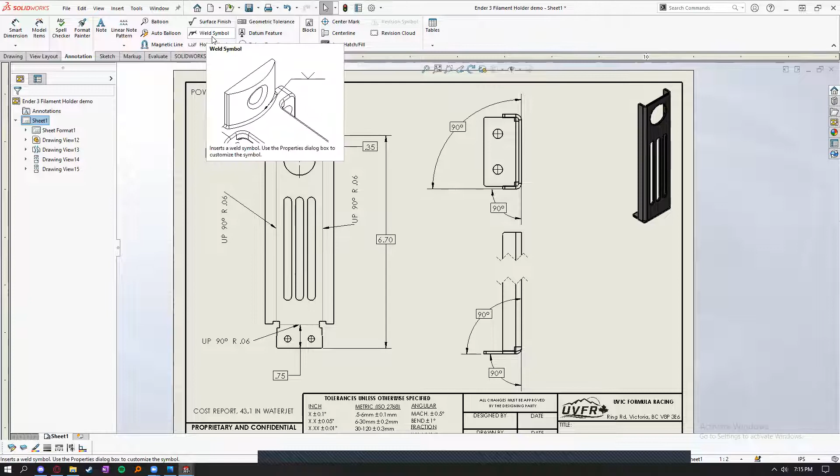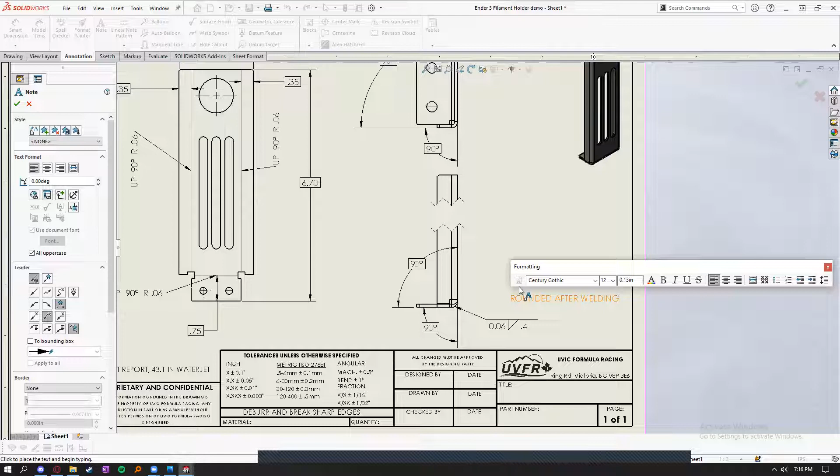So one thing you can add on, not really necessary for most use cases, is weld symbols. Because it's just a mess. It's just a lot. But just because we can. Just to indicate that this is welded. And so I'll also add a note. Note: rounded after welding. So notes are your friend.

Thanks, Paul. This is pretty much the end.

So we got a little weld in here, rounded after welding. We'll say ×2. Sometimes you might want to make another separate drawing just for welding if there's a ton of complicated welds. So stuff like this is more so for industry, not necessarily required for normal drawings.

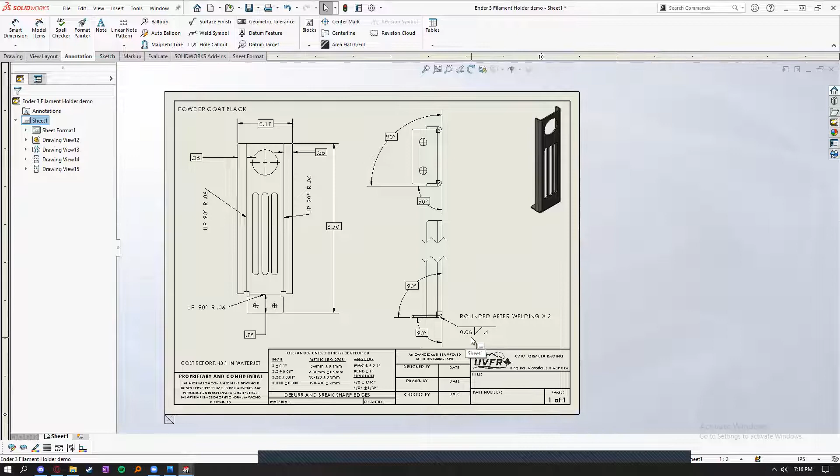Some companies won't ever use these. Some will. But that is a tool. And as I said before, just Google weld symbols because they're super complicated, and there's a lot. Okay. So let me go over everything. Because it's being water jet, I don't usually call out dimensions of these features, unless they need to be finished afterwards. So if this diameter was a super critical dimension, which you should never have in water jet parts, you would basically make a separate display state in Solidworks.

All right, see you, Aaron.

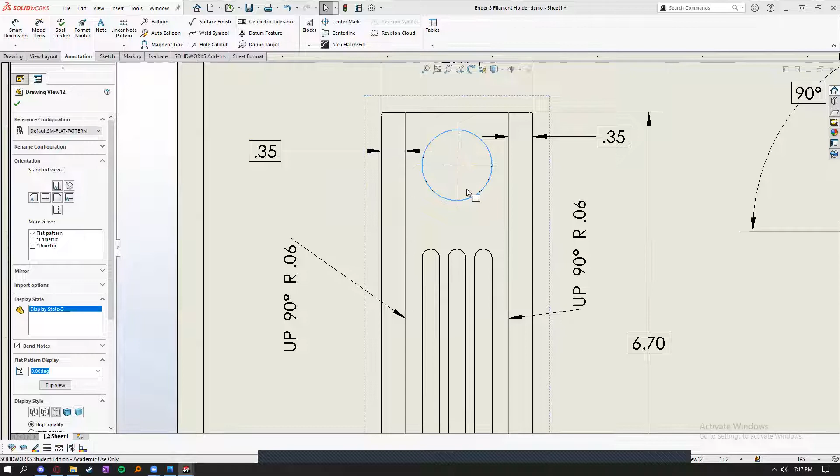Separate display state in Solidworks where this is a certain amount smaller, either to be reamed or milled post-processing, which is a lot of extra steps. So if you can get away with having the final dimensions be the water jet dimensions, then do that. That being said, there are scenarios where this would have to be, for instance, if this was a little bit smaller, or actually, I can just do that here. Reamed. And you would know that this has to be post-processed after water jetting, or after everything is assembled, but at some point before it is complete, that needs to be reamed. All right, that was a lot.

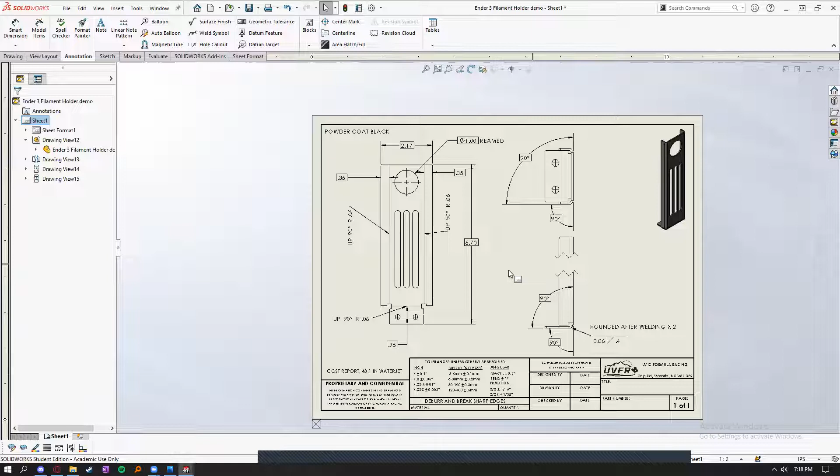But anyone left? Freddie, you have any questions? No, I don't. It was great. Thank you for that. Awesome.